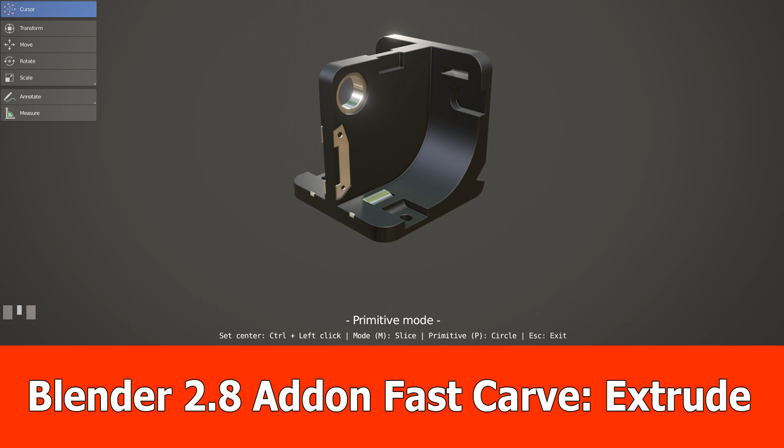Hello guys, here's a new update for my Blender 2.8 Fast Carve add-on. It is developing really fast, as the name implies, and this feature is really huge.

With this update you are able to extrude the shapes that you add in primitive mode, and with this you are able to define how deep you, for example, cut into your model. I switched here to primitive mode, with the view snapped to the top, and draw a rectangle.

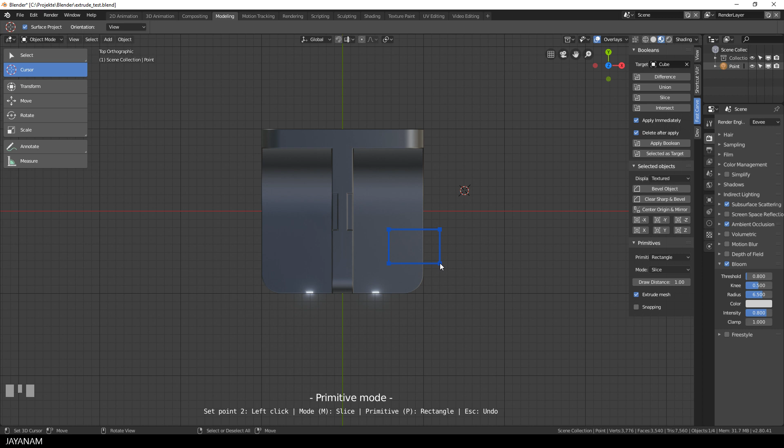When it is created, I press the E key, and here you can see that I can extrude a kind of 3D mesh. But it is not really a 3D mesh, it is just a shape. With that I can define the cut, in this case, if it is a difference operation.

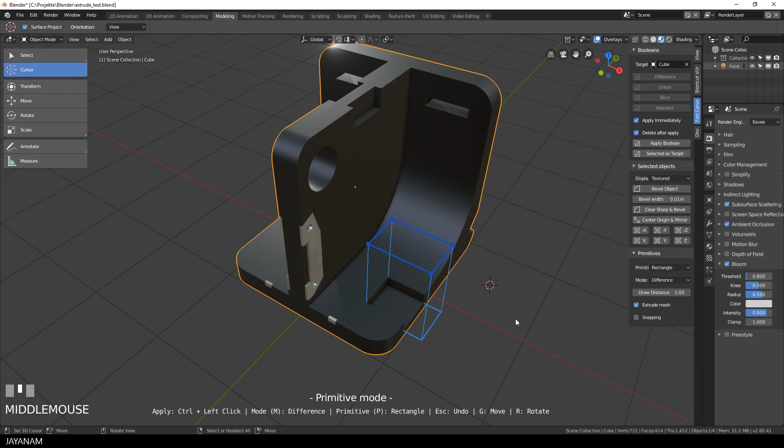As in the previous version, I press Ctrl and left click, and here's the result. I could also go ahead and reuse this shape, press the G key and move it to a different position and execute again a boolean. But in this case I press escape to get rid of the shape, and then I symmetrize to add the cut to the other side of the mesh as well.

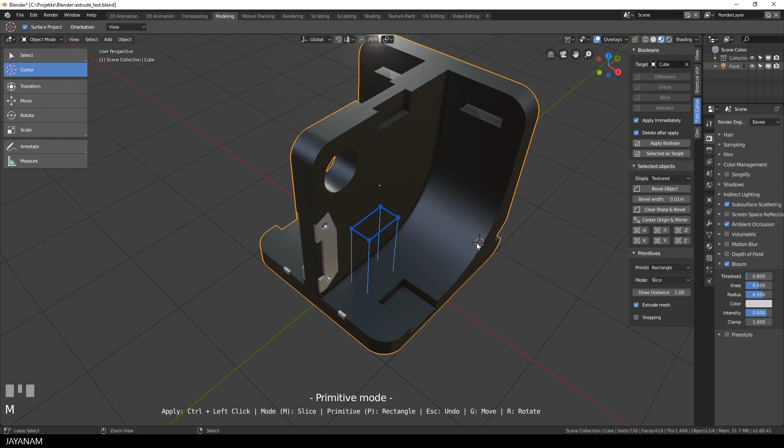Okay, now let's add again a rectangle, but this time I want to slice. So I draw it and then press E, move it into the shape, but then I change the mode from difference to slice. Press again Ctrl and left click, and then this new object is created by slicing.

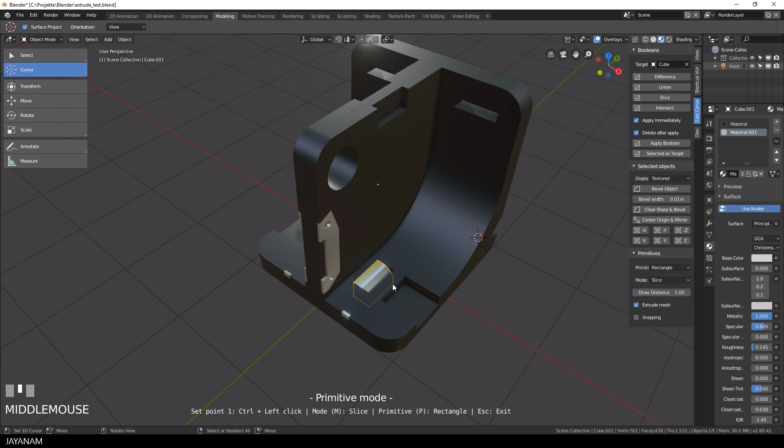I added two materials to this model, a dark and a brighter metal. Then I change to edit mode and assign this material to the new mesh. Then I select this edge and add a bevel by pressing Ctrl and B. After that I select both objects and press Ctrl and J to join them.

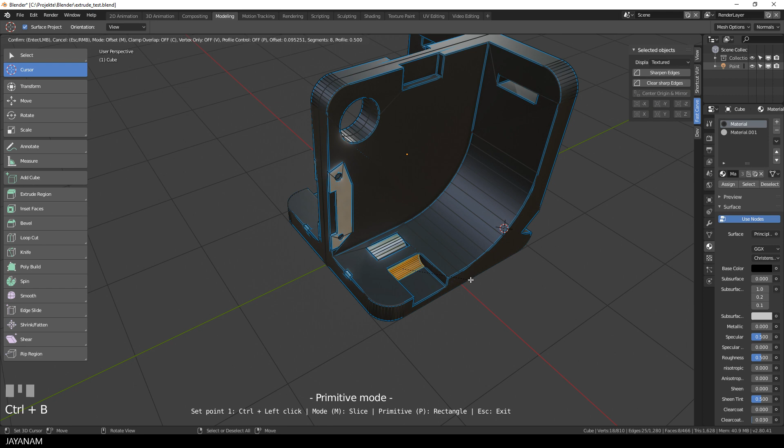And then I symmetrize and bevel the whole object, and this looks quite nice. For this inner part I will also add a bevel in edit mode, so I select this edge, press Ctrl and B. But now we have two sharp edges, the first and the last one for this bevel, but we can remove the sharpness, just select it and press clear sharp edges.

But we can still cut through the object without extruding the shape. So I will demonstrate this here by using the circle primitive, and the mode I set to difference. I draw the circle, then I press G to move it, and then again Ctrl left click to cut through the model.

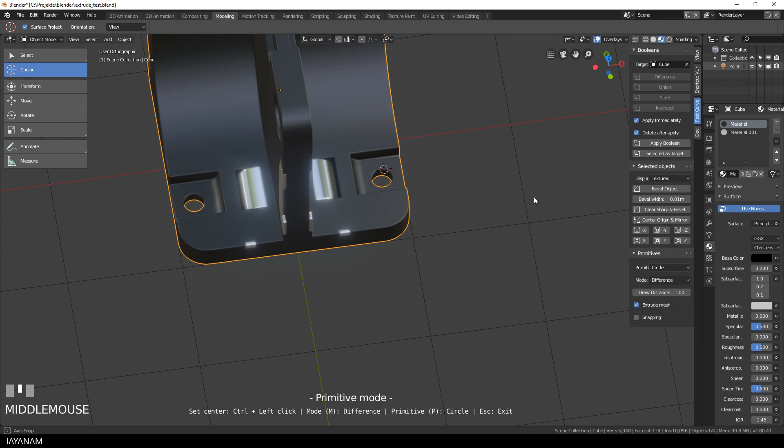Okay, what else could we do with this new extrude feature in primitive mode? We could create an object that I use then for a live boolean and modify the geometry in edit mode while we are in this pending boolean state.

So again I draw a rectangle primitive. The mode is set to create, I press E to extrude, and then I press Ctrl left click to create it.

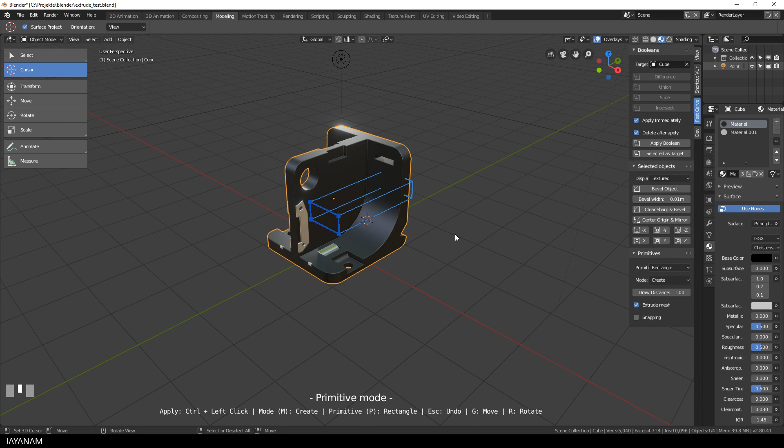Now this is really shiny because the bloom is activated, so I disable this post-processing effect for now. I disable apply immediately so that we have a live boolean.

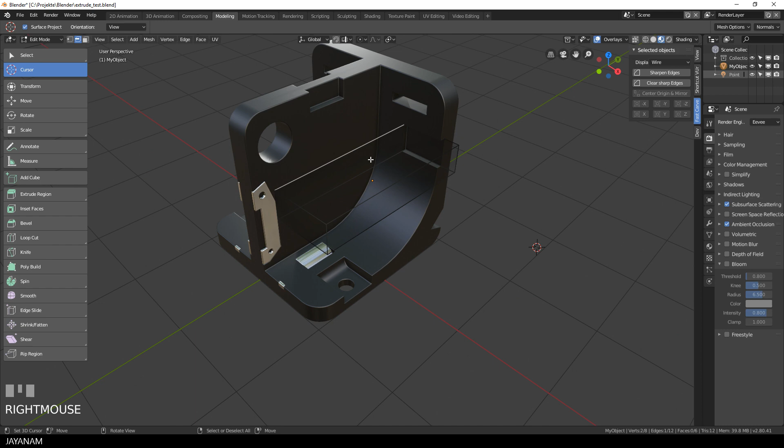Okay, now I press difference. Then I go to edit mode. I have edge selection enabled, select these two edges and press Ctrl and B to add a bevel. And you can directly see how the cut with this new object will look like after applying the difference operation.

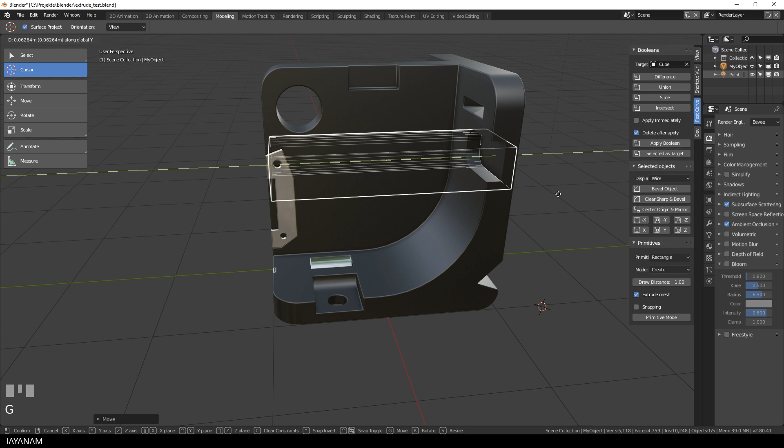I go to object mode again and select this cutter and move it a bit more into the mesh. Then I press apply, the difference operation is applied, and the cutter object is deleted because we have the option delete after apply checked. Then I reapply the bevel after symmetrizing the mesh.

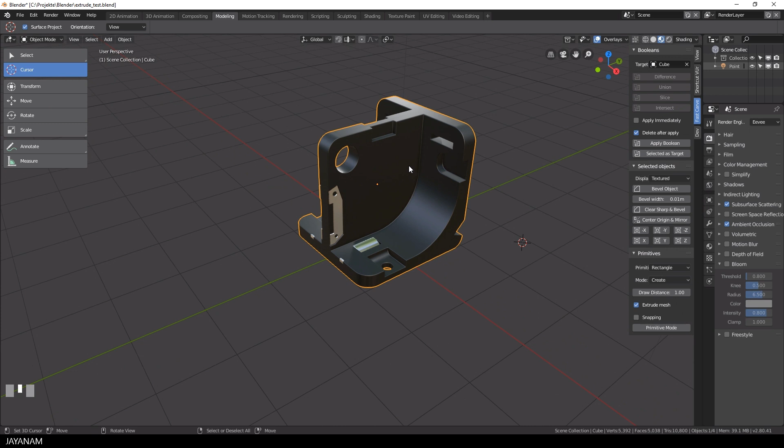Alright, nice result so far. Now let me add a new slice to the hole at the front. I snap the view, go to primitive mode.

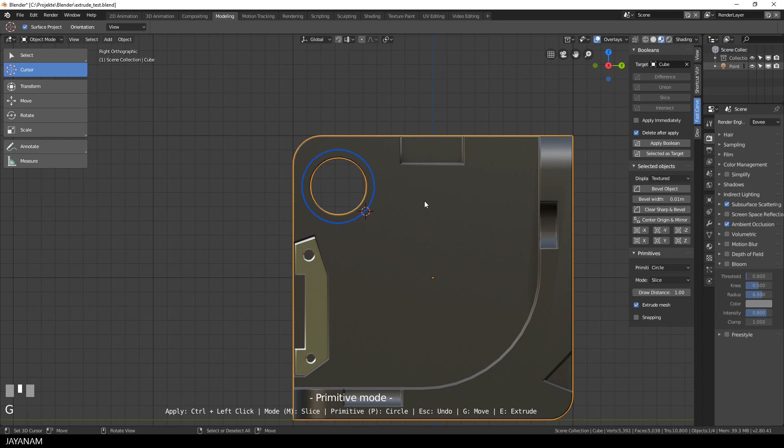As a primitive I use the circle, and then I press M to change the bool mode to slice. Okay, now carefully draw a circle of about this size. Then I move it by pressing the G key so that it is centered to the hole. And then Ctrl left click again to add the slice, and I see we have live boolean still enabled.

This means we have to apply the boolean. So we have this new object, this ring, looks good. I switch to edit mode and assign this brighter metal.

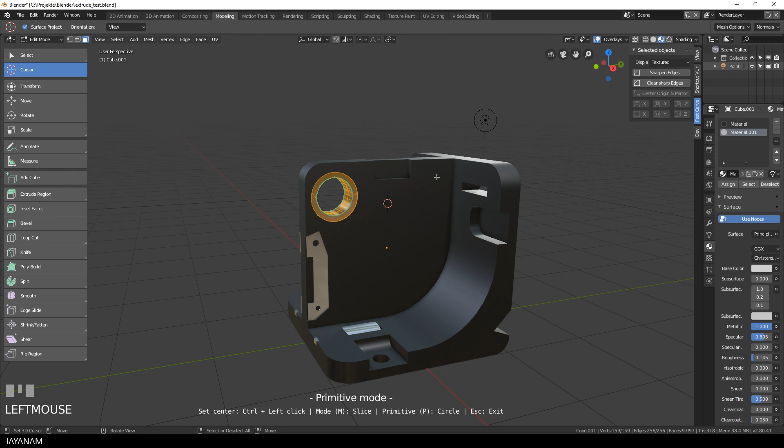In the end, I changed the size a bit by pressing S and X in this case to constrain to the X-axis. Then I add a bevel to both objects. And I think this looks pretty good and is enough for this demo. I disable the overlays now and re-enable the bloom, and I'm really happy with the result.